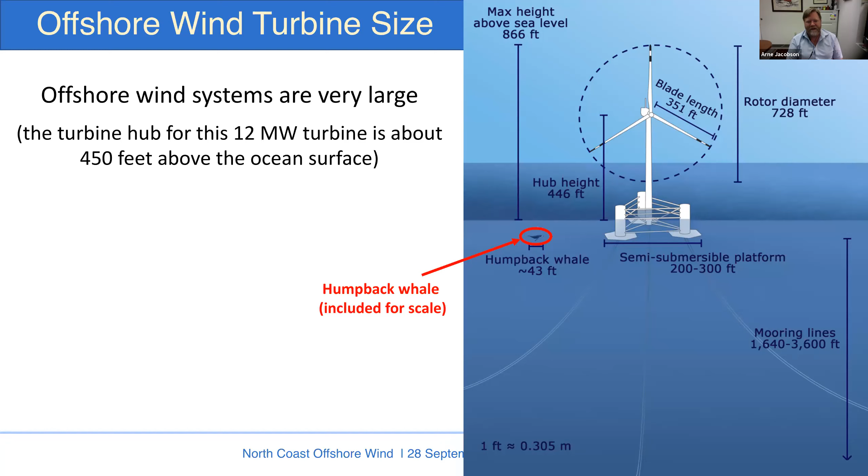The systems we're talking about are quite large. The scenarios we analyzed assumed a 12 megawatt turbine with a hub height about 450 feet above the ocean surface. We've included a humpback whale that's just over 40 feet in length in the image for scale, so you can see these machines are quite enormous.

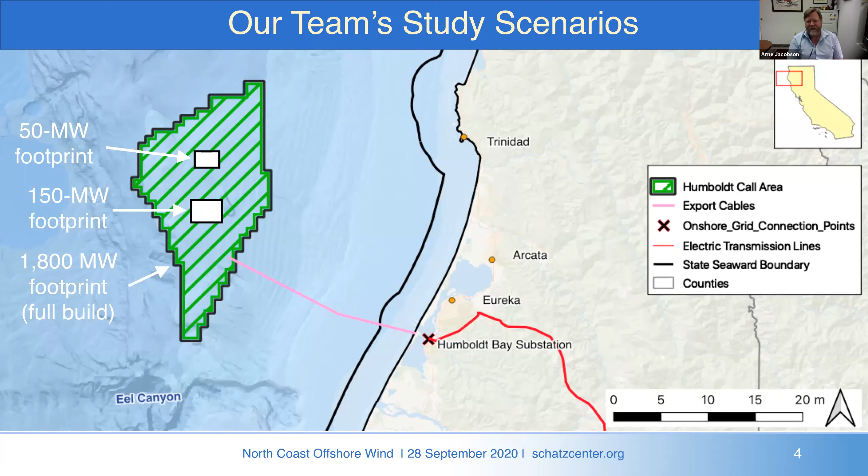In terms of our study scenarios, we looked at 3 different scales of offshore wind system. The smallest was a 50 megawatt wind farm that might involve 4 12-megawatt turbines. We also looked at a 150 megawatt wind farm scenario, something on the order of 12 turbines. And then we looked at a full build out of the Humboldt Call area, the area shown here that's been designated by the Bureau of Ocean Energy Management.

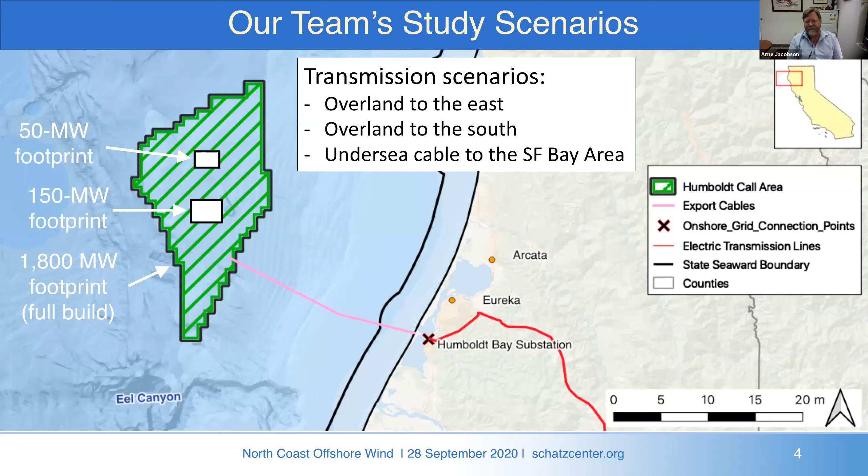A full build out could hold a little over 150 turbines, corresponding to about 1,800 megawatts of installed capacity. We also looked at a few different transmission line scenarios to connect to the main electrical grid, including an overland route to the east, an overland route to the south, and an undersea cable to the San Francisco Bay Area.

This week we're covering port infrastructure and also the part of the subsea cable that relates to the cable landing, or bringing the power on shore. We'll continue to cover other topics next week. In terms of key points from the first webinar, we noted that the offshore wind resource here on the North Coast is very large and could make a substantial contribution to meeting California's climate and clean energy goals. We also noted that transmission capacity is a major barrier for developing offshore wind on the North Coast.

In terms of economic viability, we noted that larger wind farms achieve lower costs due to economies of scale. While smaller initial projects could be used to demonstrate the technology, developers will likely want to see a pathway to larger projects to achieve economic viability. Offshore wind has good potential to create a significant number of jobs in our region as well as elsewhere in California.

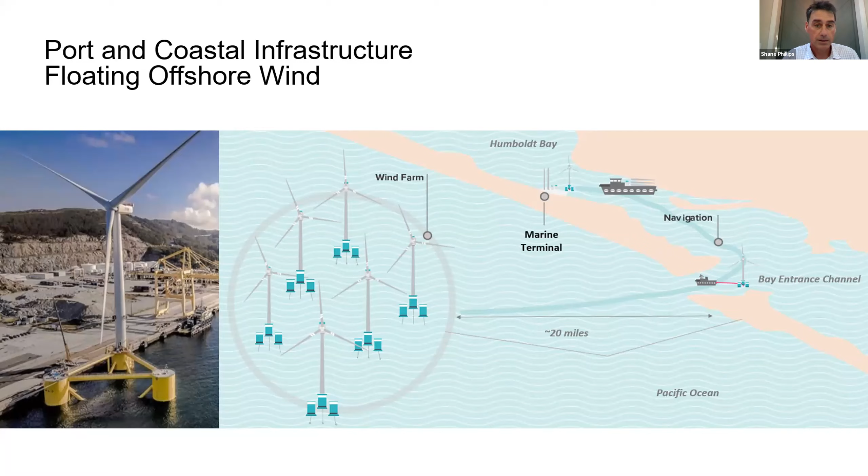In order to install these devices, there's a combination of things that would need to happen. Components would need to come in through vessels — deep draft vessels, barges, and other types of specialty vessels — that come in from the ocean and transit through the navigation channel into the inner harbor at some type of marine terminal, the landside facilities, berth, and dock. Then those components are stored, assembled into the final device, and towed back out through that same navigation channel, through the entrance, and back out for deployment at the wind farm.

So again, navigation is the backbone infrastructure element for a marine port, and that's why we've broken this into two components: first navigation, and then marine terminals. So, if you can go to the next slide.

So on the scope, Arnie mentioned some of this as well, but first and foremost, as engineers doing a planning level study, we want to start with what are some of the important criteria for our assessment and evaluation.

Those were the build out size, supporting a small build out size of 150 to 300 megawatt, or a larger size at 1800 megawatt, approximately 150 units at the 12 megawatt size. So based on that, our work was to evaluate relative to those two different classifications.

Using the best available information, knowledge of similar types of systems elsewhere in the world, and industry outreach with various folks, we evaluated and identified the capabilities and gaps within the existing port infrastructure. Keep in mind that's both the navigation channel and the landside facilities. Based upon that, we developed recommendations for what kind of port infrastructure upgrades might need to be done to meet those different scales of build out, and developed opinions on planning level construction costs, as well as potential schedules.

What you see here is a graphic of an actual offshore wind farm port facility in Europe, and it's probably on the scale of approximately what the large build out might be.

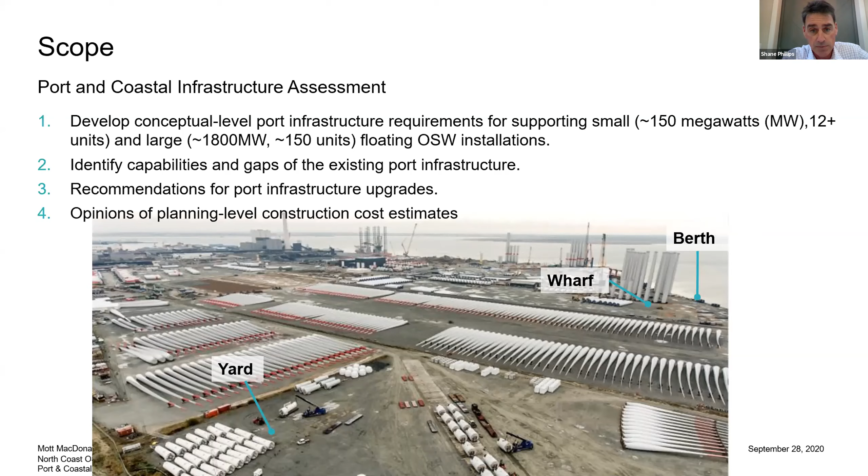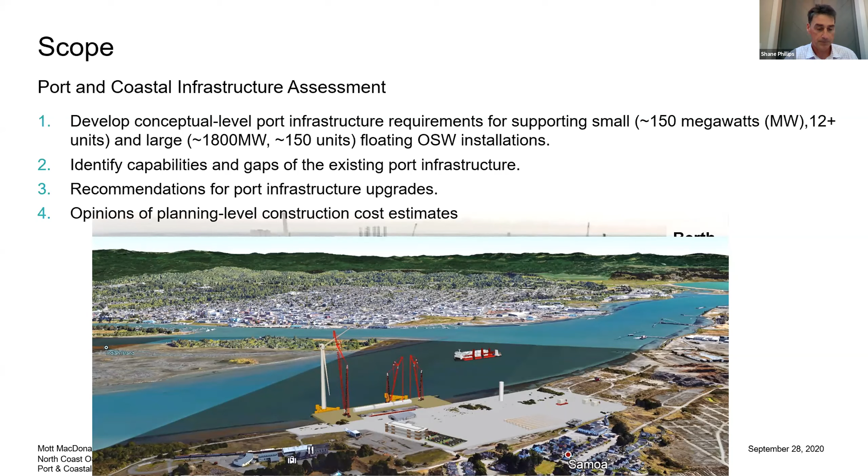In the next graphic, this is a rendering that provides a generic overview of what this might look like in the upper harbor at Humboldt. We wanted to show, before getting into the details, what we're talking about based on a prototype in Europe. This is a mid-scale size here at Humboldt to give some idea visually of the elements we're talking about as we go through the details.

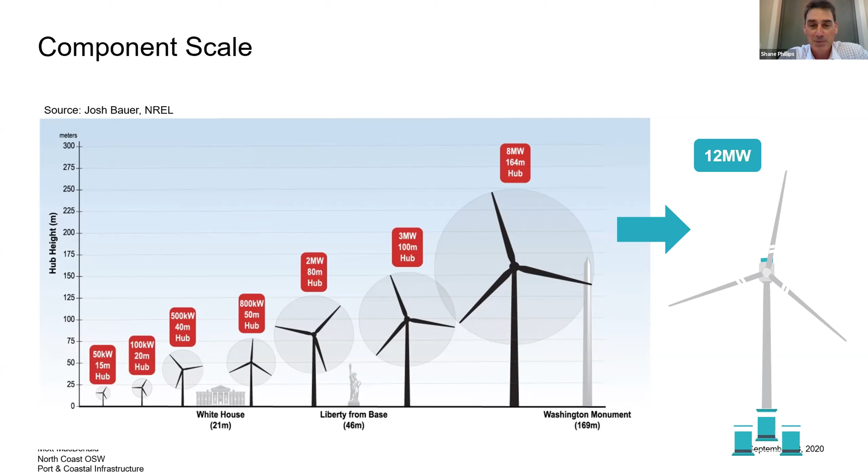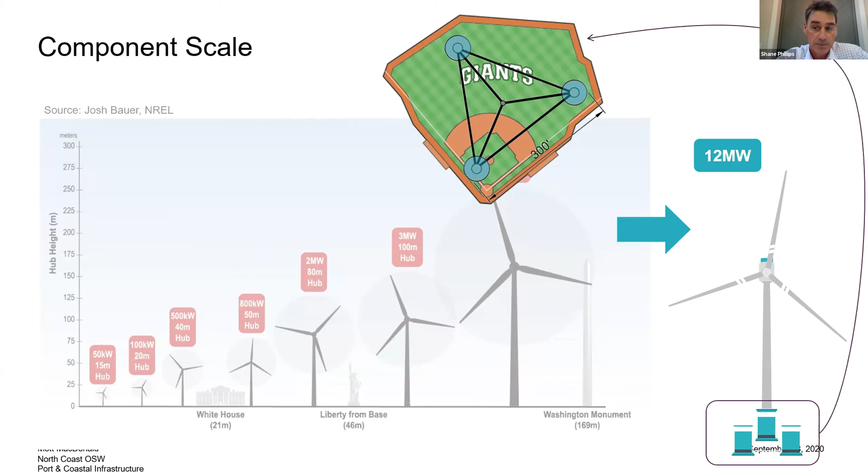Another interesting fact here—Aaron, he's a baseball fan, he put this together. This gives you another idea of scale. This is the base, not the turbine up above, but the base, superimposed on a baseball field. This is Giants Stadium. So this thing would barely fit within a baseball field, and then be extremely tall.

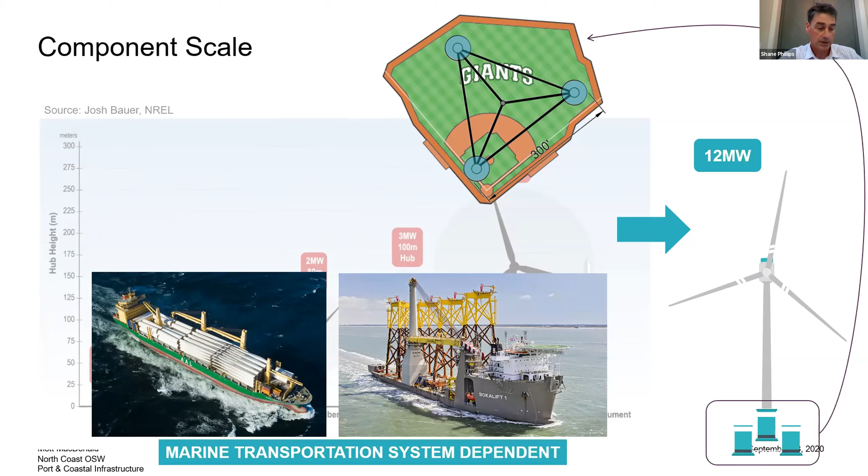The bottom line is, with such large components, it's going to be marine transportation system dependent, and that's where the marine ports come in. These components need to come in by offshore means through deep draft vessels and other specialty vessels that you see there on the left and right, but then be towed back out through that same marine infrastructure for deployment in the call area.

Just a quick recap, this is in the 2016 BOEM study that's available online as well. Like I mentioned before, this was looking at a variety of different port facilities up and down the West Coast, but very broad brush. The basis of this study that we're talking about today, some of that came from the 2016 study, and specifically for Humboldt was identified in that study as having high potential for development to support offshore floating wind.

In particular, some of those things identified was no air draft restrictions, again, because these are extremely tall, we don't want any air draft restrictions. Having the available water depth that would be needed for a navigation channel. Wave climate—we've got a protected harbor where the assembly of these devices can occur and don't have to happen out in more open water or open ocean conditions that would provide a lot of limitations. And then the close proximity to the potential call areas as well, to minimize the amount of transit time.

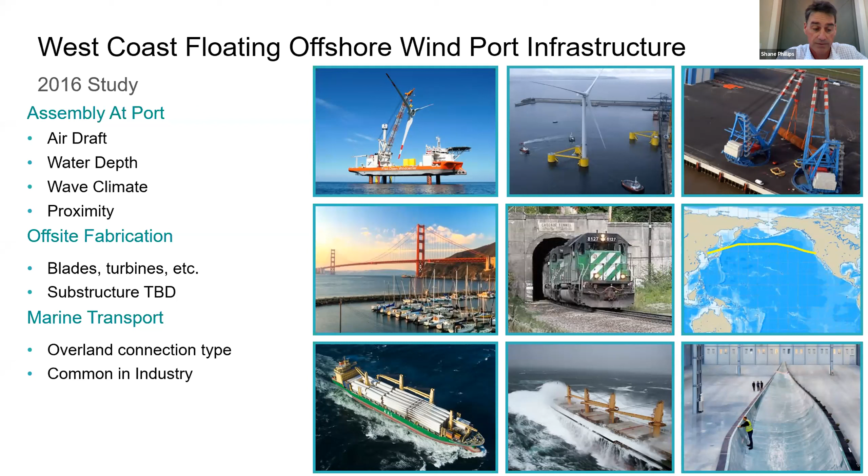Some of the other elements were being able to evaluate it as a component of offsite fabrication, being brought in through marine transportation of individual components and then final assembly, or there was possibly the option of also having on-site fabrication as well.

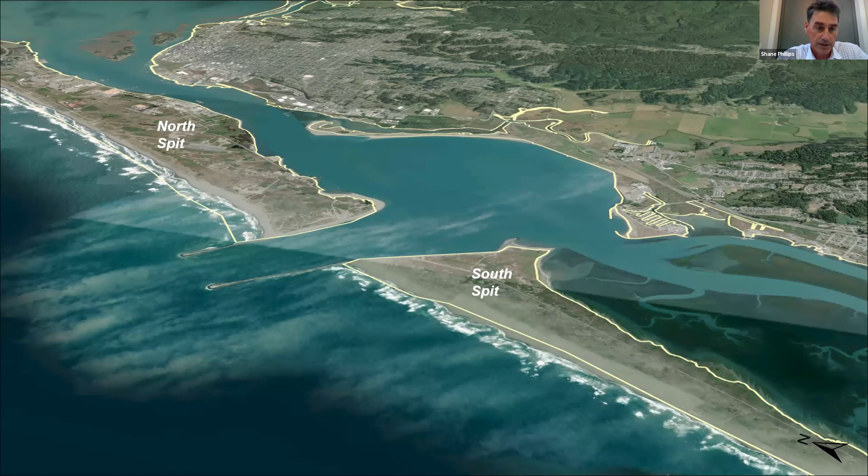So this is an oblique aerial of Humboldt Harbor. It just gives you an idea of some of the terms here. Generically, this is the North Spit and the South Spit, with the entrance jetties, big rock structures right at the entrance.

These are the navigation elements, the navigation channel. So you have the entrance channel, which is deeper and wider as you enter from the ocean into the harbor. It's larger because it's more exposed to the wave climate and motions due to waves, but also more sedimentation. Then as you come into the entrance harbor, there's the Fields Landing channel located to the south, a smaller channel for smaller vessels and barges.

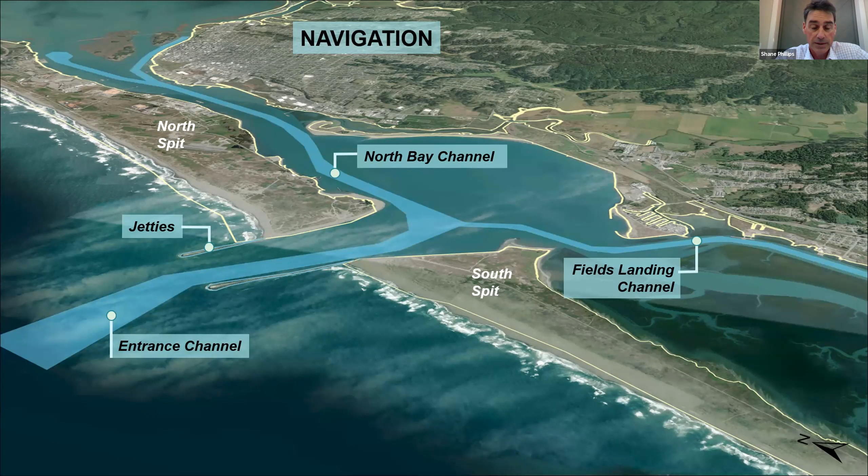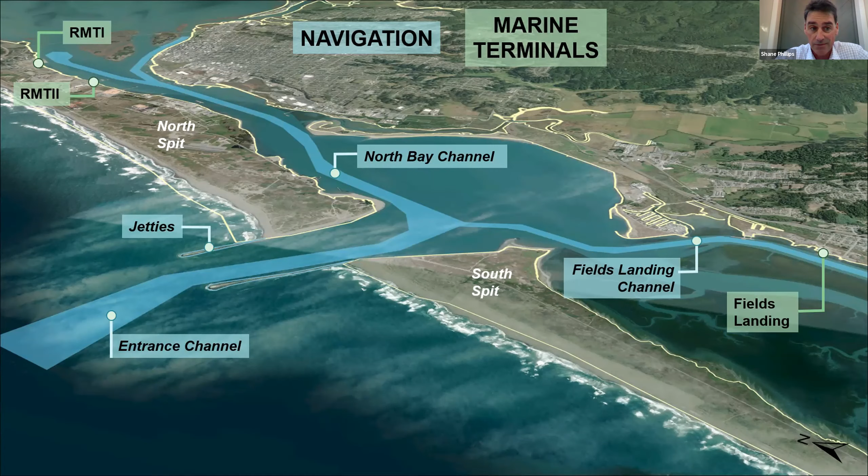And then the so-called deep draft vessels — these are the bigger commercial vessels I showed on the prior slide. Those would be transiting the North Bay Channel and have access up through to various facilities along the North Spit. From marine terminal perspectives, there's RMT1 and RMT2 — existing facilities developed based on the navigation channel to support forest products industries. And then again, the Fields Landing, a smaller facility to the south. So you'll be hearing about those.

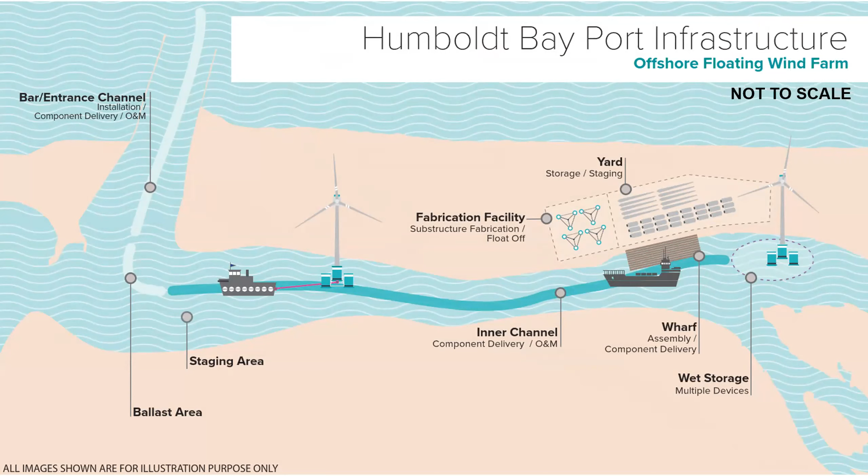Okay, yeah, good question. So air draft would be like a bridge. The Golden Gate Bridge has an air draft restriction to avoid any conflict or impact with that bridge. So the Bay Area has air draft restrictions because of that bridge, whereas here there are no bridges across the navigation channel. So there are no air draft restrictions at Humboldt.

So again, here are just a few things we'd like to point out, and we'll use this graphic a few different times through the detailed discussion. Vessels will be transiting in through the bar or entrance channel, that's on the upper left there — on the prior aerial photo that showed where the jetties were at the entrance.

They would come in and then offload, and then you can see the marine terminal, which is where the components are stored — a combination of a yard and the possibility of a fabrication facility. So all the components would be stored there, then assembled into the schematic configuration you see on the right, with the possibility of wet storage for assembled devices or individual components prior to their preparation for tow-out.

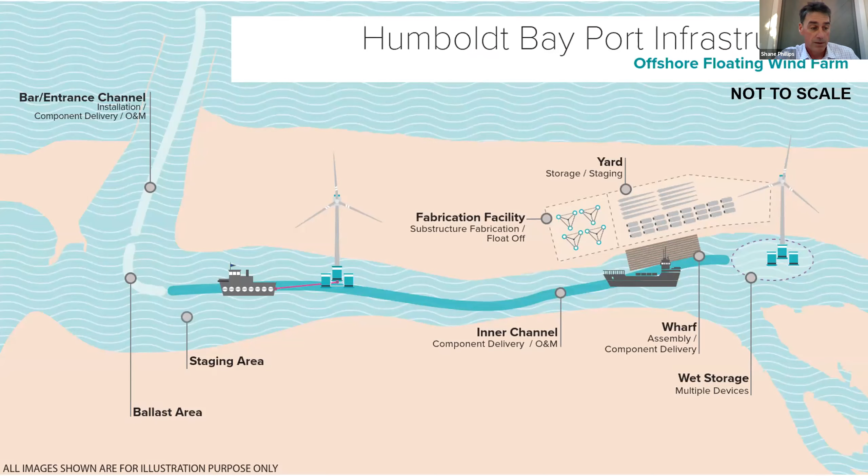And so the devices would then be towed back out through the entrance channel. As you're going from right to left, depending on the type, size, and details of these devices, there may need to be some ballasting for stability before it's towed out through that entrance channel. Others may be able to be towed directly out into open ocean and then ballasted there and taken out to the final deployment area in the wind farm.

So the study methodology, again just as a reminder, what we did in this phase was a pre-feasibility level assessment. This isn't a detailed evaluation, and as Aaron said, it's not a design or evaluation for a specific project. It's more of looking at infrastructure relative to a possible offshore wind farm development.

Our methodology is a combination of things. First, we visited with a number of folks and stakeholders when we kicked off the study. We did a site inspection looking at all the different facilities, getting a good idea of the on-the-ground conditions. We did a full data compilation and review, both of locally available information and outreach to other government agencies, and a lot of industry outreach as well, getting information on prototypes and literature. Other stakeholder engagement included the Vessel Pilots Association, the Harbor District, and developers.

That framed the basis for a conceptual level analysis, and then the development of potential pre-feasibility level upgrade schematics, some of which we're going to show today. And then, based on that, order of magnitude cost and what type of time frame for implementation those upgrades might need.

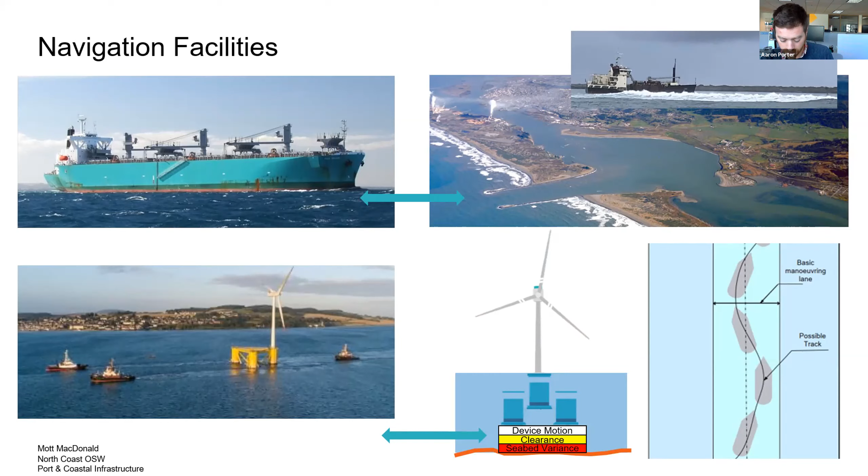The existing navigation system was designed specifically for forest products and certain classes of vessels with associated safety clearances, but not necessarily for the towing of some of these wider, bigger vessel units. So our assessment is focused more on the specific needs of towing the devices rather than the deeper draft vessels.

We went over this a little bit at the beginning, but I wanted to show a clean schematic of the different geometries for the harbor, or the navigation channels. These are the different federally designated channels, or federal navigation channels, which deep draft vessels use to access the harbor. There's the bar and entrance channel, which is around 48 feet deep.

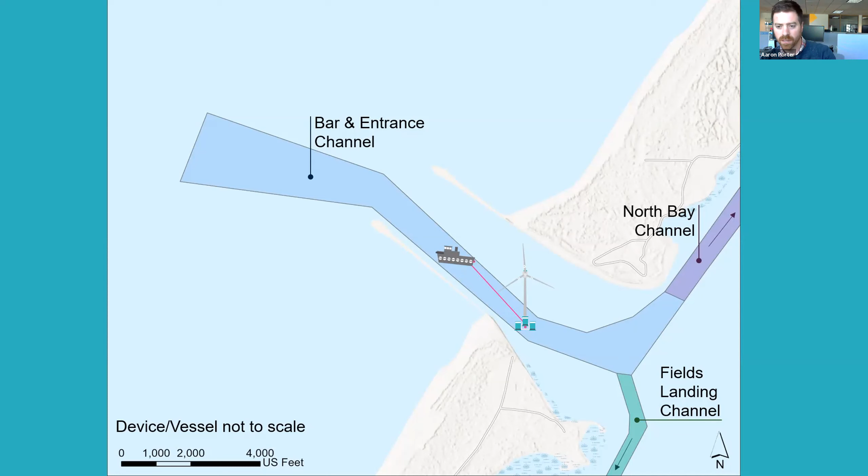The North Bay channel is not as deep because it's not subject to the same amount of waves and currents as the outer channel, and the Fields Landing channel, which is a little narrower and shallower than the other two. These channels were designed based on the conditions and the types of vessels using those facilities, so the depth and width vary between them.

So I'm going to walk through this figure. It looks a little intimidating at first, but I'm going to start here on the right and go out to the left. As some of these devices are assembled up near the port and towed down the inner channel, one of the things I have listed here is the inner channel width limitation.

The inner channel is around 400 feet in width, and the devices we assessed are potentially between 200 and 300 feet in width, which is a little tight relative to some of the criteria we looked at for geometric requirements for towing a device of that size.

As we get farther down, we have the different available staging areas—areas that might be available for a device to be stored until conditions are more favorable enough to tow out to sea. The device would then get towed around the corner here.

This channel was designed for deeper draft vessels, and not necessarily narrower deeper draft vessels, and not necessarily some of these wider specialty units. We identified this as an area that could be potentially tight or have a limitation on the width of the beam of that device for safe navigation.

Shane, anything to add there? I think the main point overall is just that it appears feasible to be able to tow these devices out, and as Aaron mentioned, deeper draft vessels coming in with the size components that are needed.

It's really going to be the size of the device. There's two ways of looking at it: either the channel may affect the size of the device that can fit within that channel, or there might need to be some improvements to the navigation channel locally in certain areas if a larger device was needed.

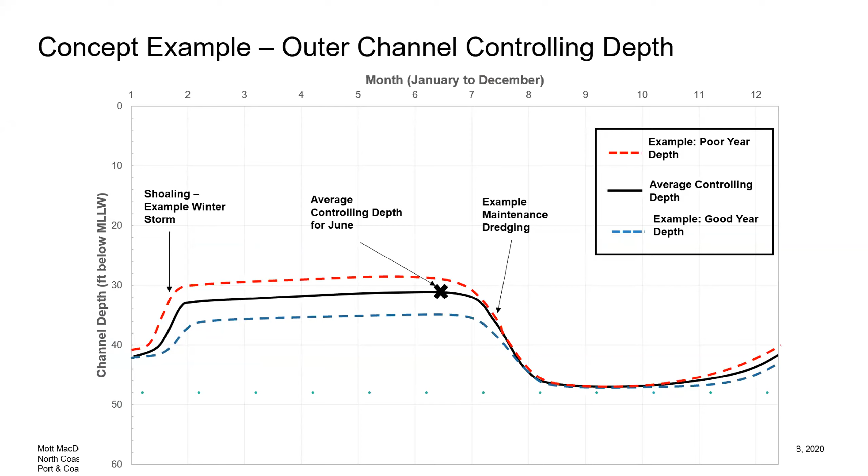Yeah, go ahead, Aaron. So a couple other aspects we looked at - I mentioned those parking lot areas as part of the marine roadway - was wet storage. Similar to other major port areas where there's anchorage offshore to allow consistent throughput at the port, similar may be done for some of the substructures that are delivered to the port or fabricated here, waiting to be assembled before they're towed out.

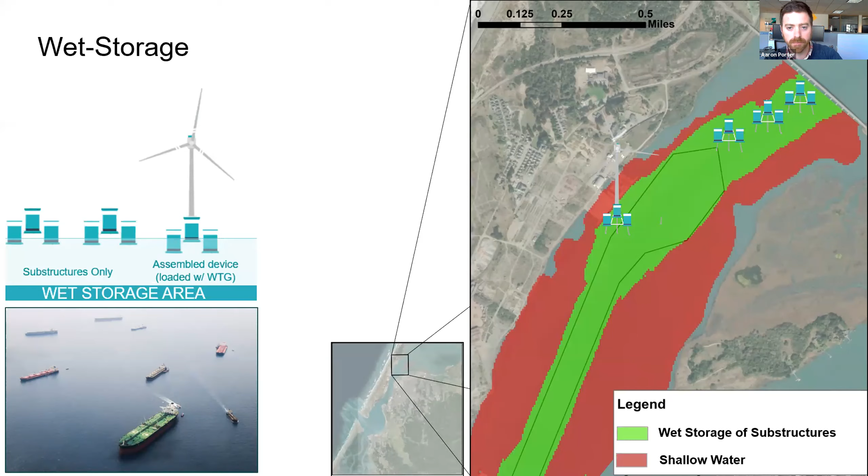Part of our assessment was, one, is there room to do that? I think the short answer is it looks like there is some room to put a number of different substructures in there as wet storage or anchorage to the north of the Federal Navigation Channel, at the turning basin, while still allowing for a fairway for other vessels to navigate.

Another aspect of the study we looked at was whether there's some potential area near the entrance to the exit to the bay where some substructures could be stored for the short term or ballasted, so that they can be towed out to sea in favorable weather and potentially with ballasted depth.

I think the short story here is there look to be some areas where staging may be possible. It's really dependent on the device geometry and needs itself, whether or not the device needs to be ballasted, or whether it can be ballasted at sea, and what the exact draft of the vessel is - that will really affect where these available areas are for staging and ballasting. So that's to be determined and is really dependent on some of the operational constraints and device geometry.

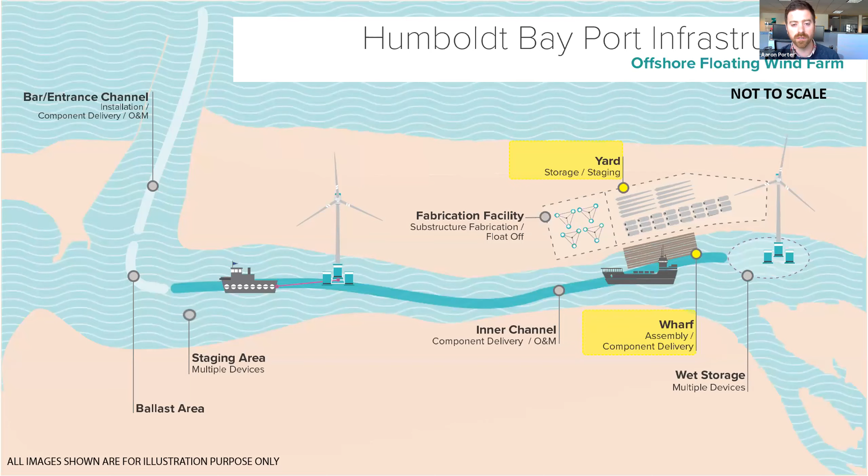So now I'm going to move into the marine terminal. That's where we're looking at the yard - the upland area where device components are stored and staged - as well as the wharf itself, the overwater structure.

So to do this, we looked at a range of potential facilities located adjacent or near the Federal Navigation Channel, and developed different criteria to assess whether those were capable of supporting a floating offshore wind terminal. What we weren't assessing is structure condition.

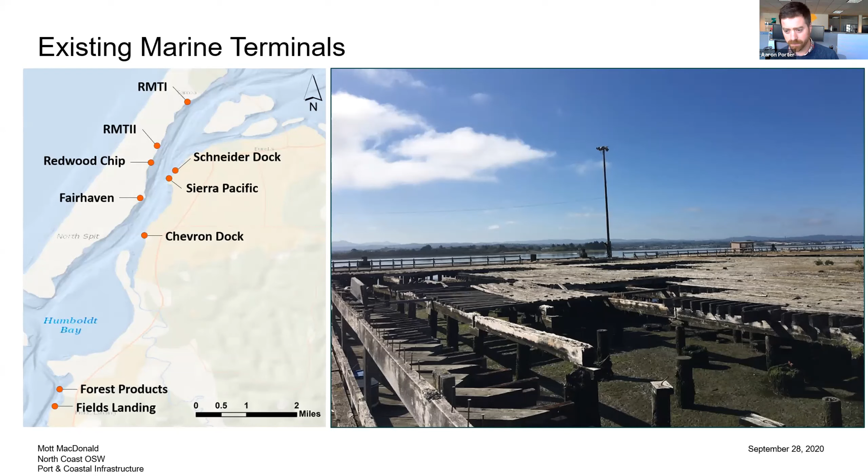So what we assessed first was really just the upland area. Is there enough area around the marine terminal to store components? And two, are we able to construct a wharf without major navigational impacts? And can vessels and devices access that wharf?

So we conducted a screening analysis both for assembly and operations and maintenance facilities. That's shown here on the left. In green are the facilities that met our primary criteria of enough upland area and not having significant navigation impacts.

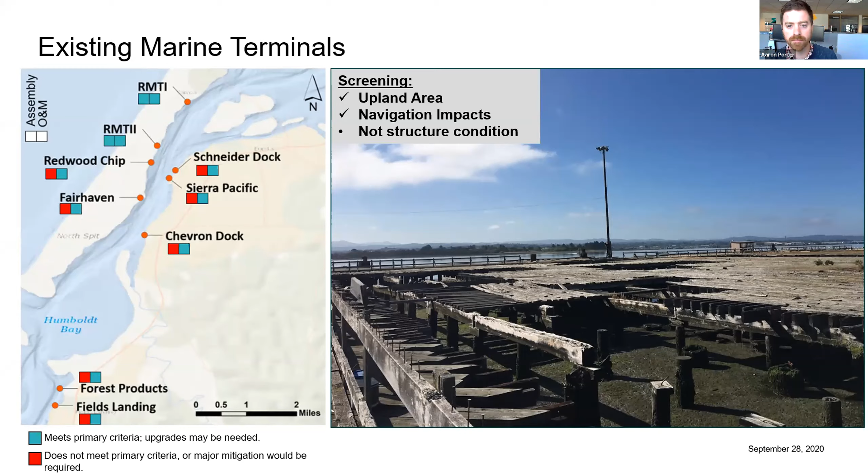Red means the facility doesn't meet the primary criteria—not enough upland area or having navigation impacts. There are more locations that can potentially support O&M, because those upland area and navigation facility requirements are not as high. So there's a number of different O&M facilities that could potentially support operations and maintenance for crew transfer vessels for minor repairs out at the wind farm.

Shannon mentioned this before—there's just a couple of terms I'm going to use in the next few slides that I want everybody to be aware of. That's the yard, where storage of the components will be; the wharf, the overwater structure; and the berth, the area where vessels come to port and navigate right next to the wharf to moor.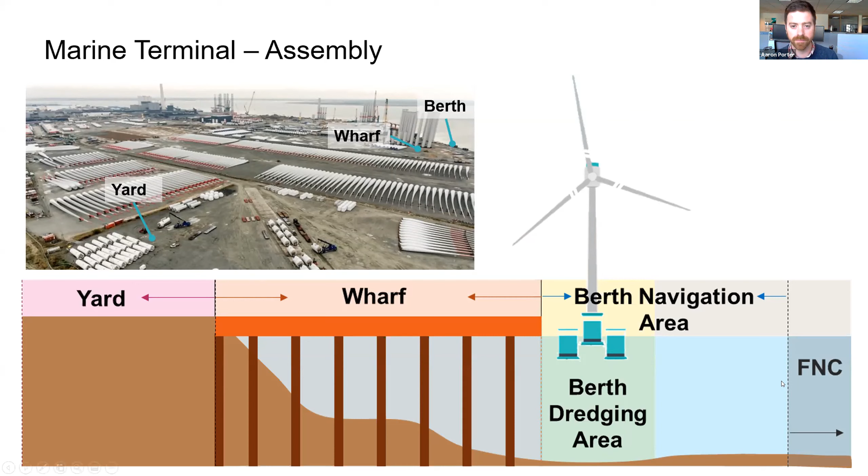What we're not focusing on, as we talked about earlier, is the FNC, or the Federal Navigation Channel, shown here on the right.

So we developed a few hypothetical terminal layouts for the assembly facility. Here on the left is a hypothetical small project showing the yard, potential wharf, and a potential berthing area relative to the existing Samoa turning basin. The dashed line here is the existing RMT1 wharf area.

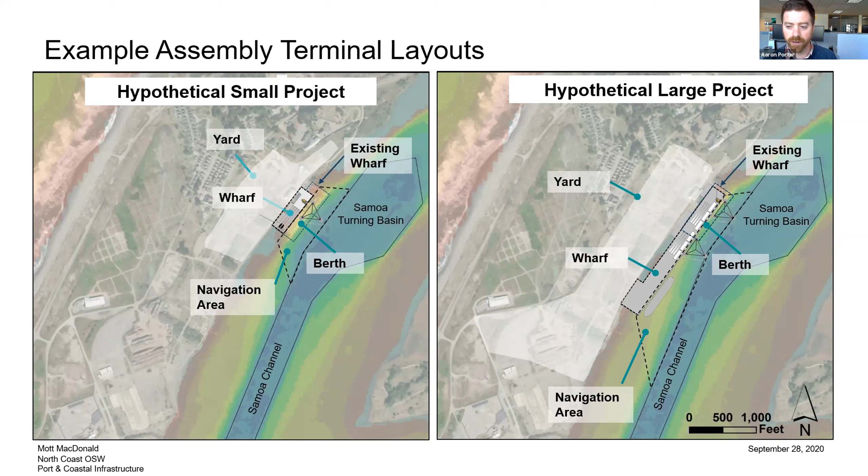Secondly, we have a hypothetical large project. It's a bit bigger in terms of the yard, berth, and wharf because there's going to need to be more throughput—more vessels coming through, more devices being assembled and towed out at a higher rate. Because of that, you need a larger yard for storage of components and more berths that can be exclusive to different types of activities.

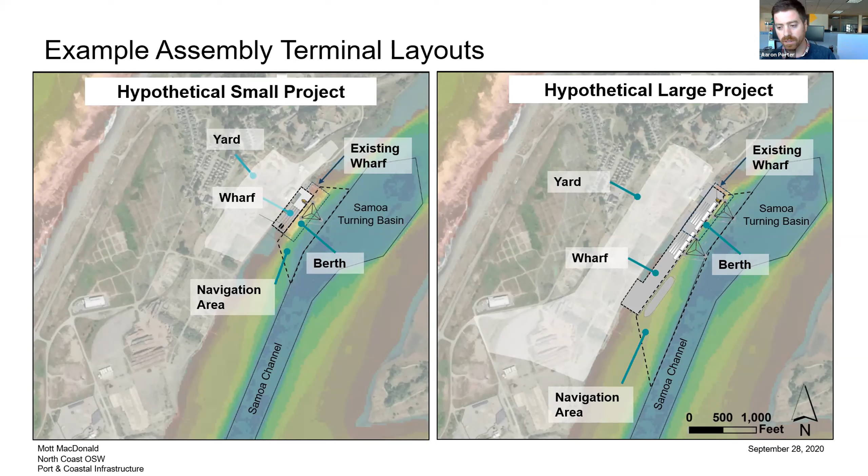Whereas on the smaller hypothetical project, there's the potential to have a multi-use berth due to the lesser throughput.

Each of these have some similar considerations. For the yard, there appears to be sufficient space at the RMT1, RMT2 area for either size project. That total area depends on the navigation constraints—if there are fewer navigation constraints at the harbor entrance, less storage might be needed because there's more constant throughput of components coming in. Ground improvements are likely just needed for enough capacity or live load capacity to store those components.

There might need to be some grading or leveling of the ground. For the wharf, in both the small and large project hypotheticals, orientation, location, and exact size should be coordinated to minimize impacts on the eelgrass beds. We understand there are some eelgrass beds in this area, but that would need to be looked at in more detail going forward.

It's important to note that in either case, dredging is likely required to support assembly or component delivery. And if fabrication is going to occur in the area, that's potential additional exclusive-use berths and maybe a larger yard area to support another exclusive-use terminal for that purpose.

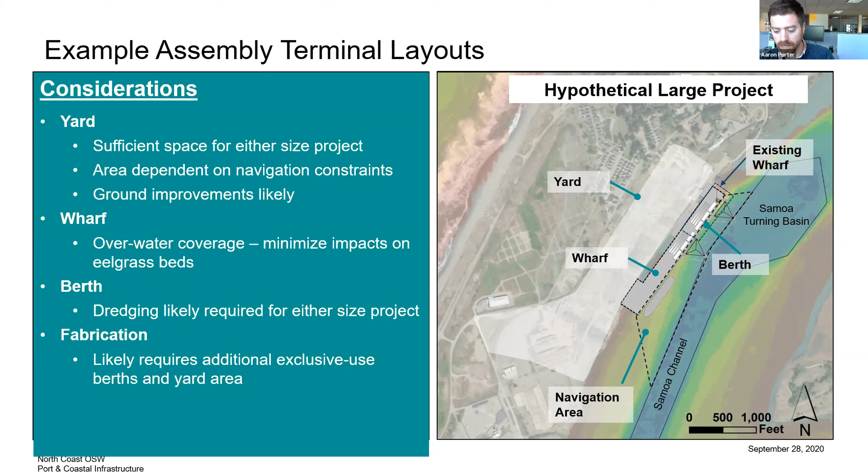Shane, anything to add there? Aaron—yep. Oh, this is Sarah, I just wanted to wave a small flag at the 5 minute mark. All right, sounds good, thank you. We're on target. So Shane, anything to add there?

No, yeah, that's good. Keep going.

So, what needs to happen? What are the concepts for what that structure looks like?

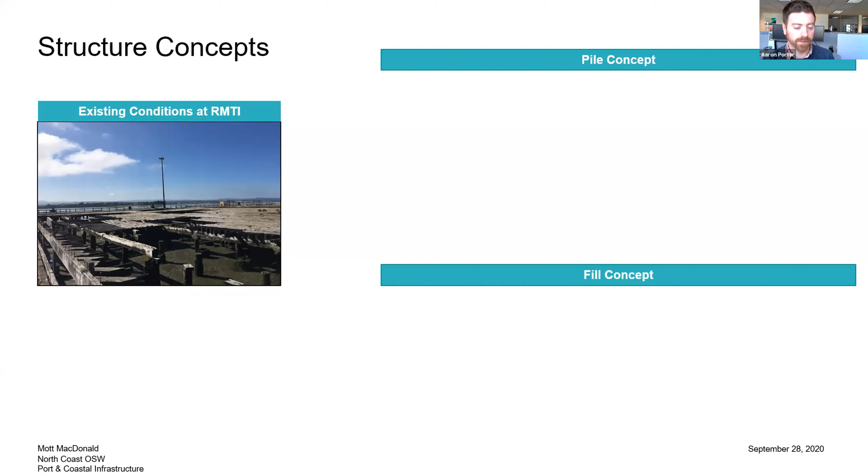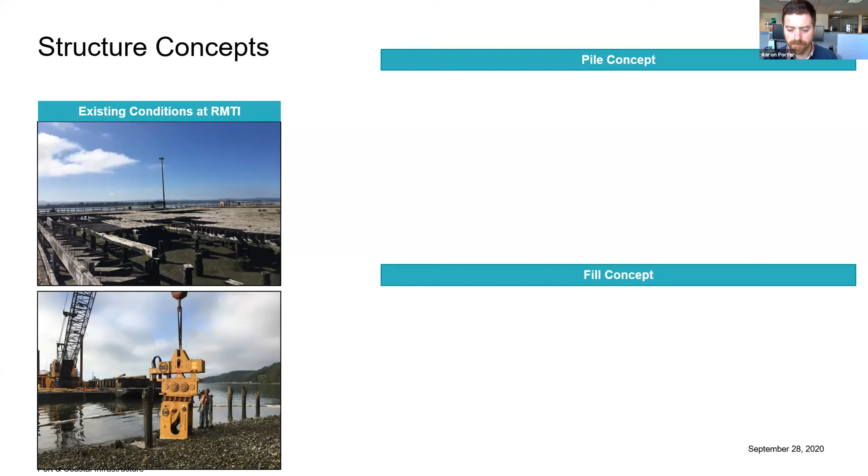First, the existing conditions in RMT1 would need the pile field there, if that's where the wharf is going to be constructed, pulled out—those creosote piles removed so a new structure can go in. The level of removal depends on what level of extraction is required. But looking at the geotechnical conditions at site, right now it's looking like either a pile concept or a fill type concept.

A pile meaning concrete or steel piles driven into the ground. There looks like there's a good layer of soil, potentially below a softer, poorer layer of soil, that may be able to support the piles.

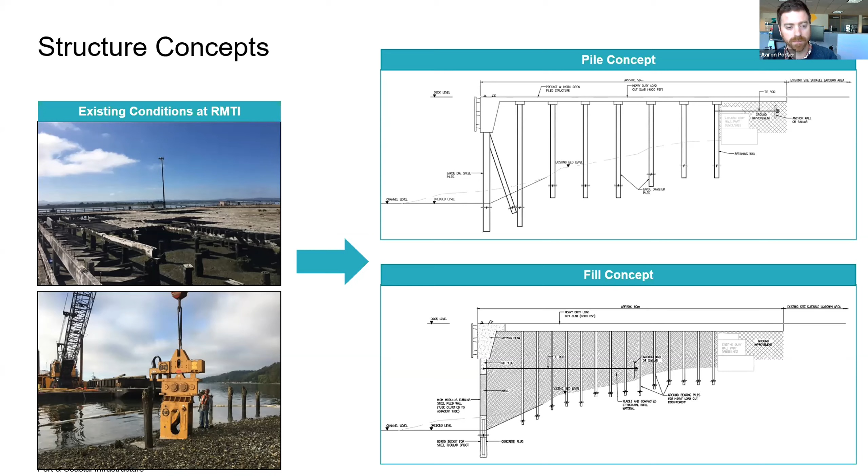But if not, we might have to go towards more of a fill concept, and that's going to be pending additional geotechnical investigations. But for the moment, it looks like either is feasible for construction of a high-capacity wharf to support assembly and component import.

So, summary for the port infrastructure assessment: the navigation channel looks like it can likely support offshore wind projects in general, but the device size needs to be coordinated with the throughput requirements for the project. Bigger devices with the same channel geometry will have less throughput per year because there'll be more constraints on towing those devices out.

On the marine terminal side, berth dredging is likely required. A new wharf is required. And there's the grading and yard ground improvements to consider.

Operationally, seasonal installation looks likely due to the wave climate out in the Pacific, but components may need to be delivered year-round, which could affect timing adjustments needed for maintenance dredging in the channel. So even if assembly and installation of the devices doesn't occur in the winter, there may need to be additional components brought in during that time of year.

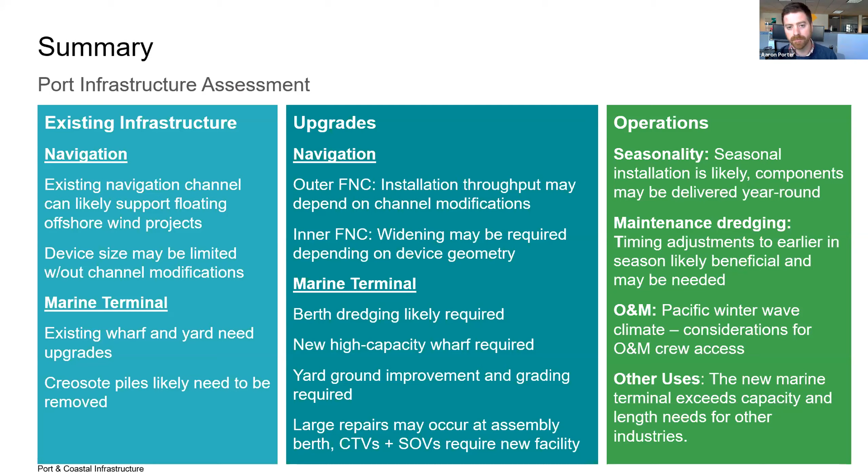And then, other uses—just wanted to note that the marine terminal exceeds capacity and length needs for other industries, and after use for assembly, it could potentially be used for other industries as well.

Rough order of magnitude costs for the small to large facilities: that's in the $50 to $110 million range for small, potentially $150 to $300 million range for large. And then if there's an additional fabrication marine terminal, that could be $50 to $100 million—could be less depending on details. But at this level of assessment, it looked to be around that range, where the O&M marine terminal portions would be significantly less than that.

I'll turn it over to Shane to talk through the schedule.

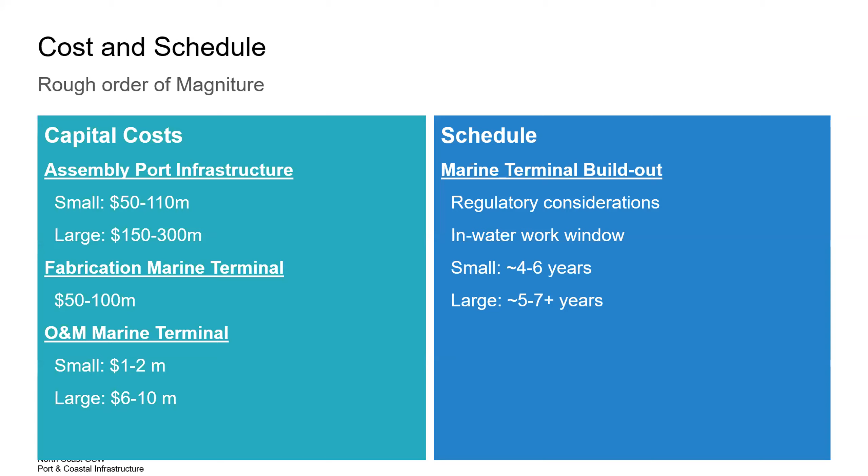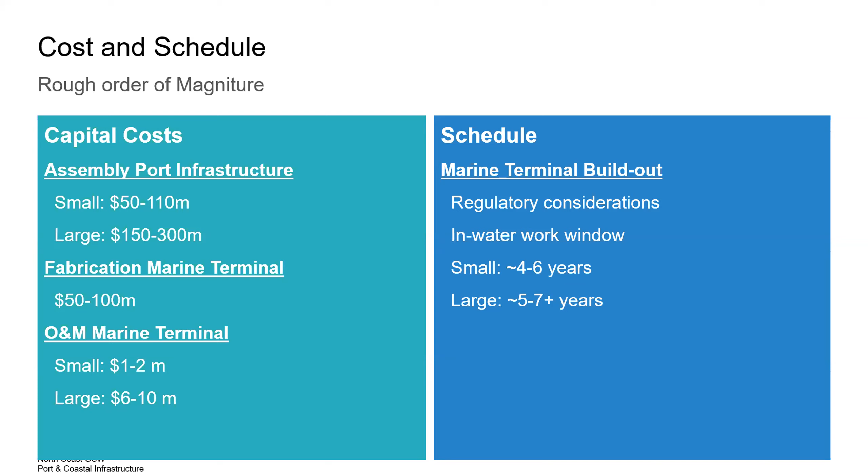On the schedule, for something of this size, both small and large, there's a multitude of regulatory considerations in addition to in-water work windows. The smaller scale would, of course, have a shorter schedule for implementation than a larger scale. Some of the bigger factors are just the scale of the area affected, in addition to probably requiring multiple years of in-water work windows to get the work done. So we're estimating 4 to 6 years versus 5 to 7+ years, depending on the size and details of what the development would be.

I think the big story, the short story, is: feasible.

Device size might need to be coordinated to ensure safe navigation for the throughput required for the project. On the marine terminal side, facility upgrades are feasible but require investment. Shane, anything to add before we go to cable landfall? No, I think you've got it covered.

Part of our assessment was looking at cable landfall for an export cable from the wind farm. That's where cables are buried in a trench out to the wind farm location, brought up to the beach in conduits that go from the upper berm out to below the water level. I'll show a transect next. There might be one cable or six cables. Those conduits under the beach are installed potentially using a horizontal directional drill, which is like a small tunneling machine that creates a conduit so cables can be pulled through from offshore up into the uplands.

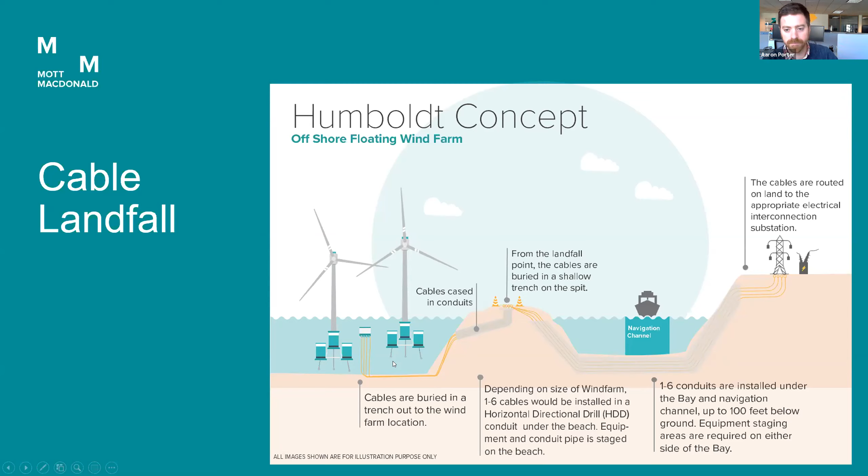Due to the length from the bay side out to the ocean, there needs to be first a cable landfall on the spit, and then a secondary HDD conduit installed underneath the bay over to the mainland side. It's too long to go from this area all the way under the bay and under the spit out to the ocean.

So there are a few different options. These are just hypothetical alignment options, but it looks like there are options either on the south spit with a crossing over the bay, or an option anywhere on the north spit with a crossing on the north side. It's short enough where an HDD is possible from the north spit over to the mainland as well. In this assessment, the Humboldt Bay Generating Station was our substation location, so it would be a longer upland route if that were the case.

The trenchless technology is again likely feasible, but I wanted to note that this looks simple here on top—you just drill a tunnel basically into the ocean from the spit. It looks simple, but it can be one of the most complex elements of the project, and it's really important to get right so that you don't derate the cable, meaning if it's not done right and assessed right, there's a risk of derating how much energy can go through the cable.

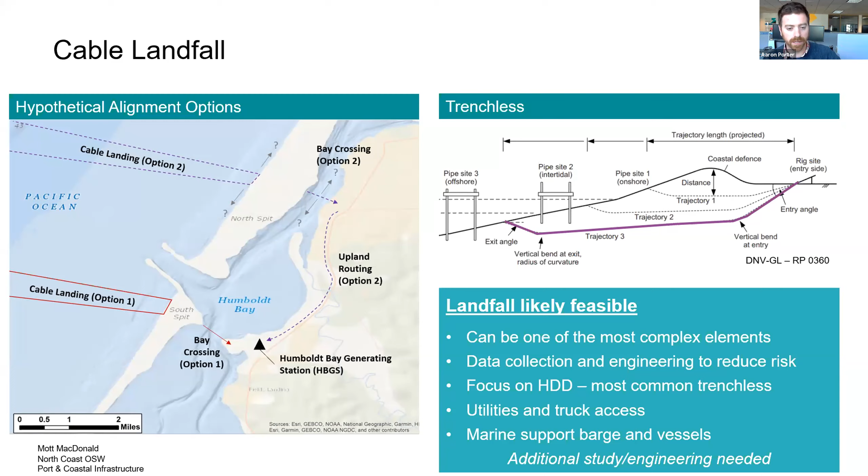This assessment focuses on HDD, which is one of the most common trenchless options for landfall. Important to note here is that wherever that landing location is picked going forward, good assessment of utility access, truck access, and barge and other vessels needed to support the punch-out of the HDD on the ocean side will be required.